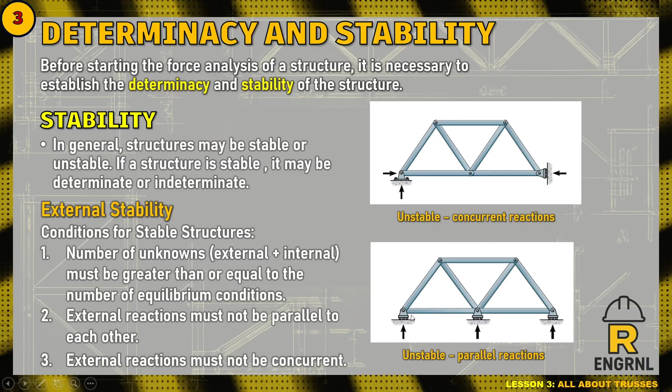External stability, you can classify again using this concept, and by common sense pa rin naman, of course, no? Gagalaw ba to kapag ganito, interconnecting rollers, supporting rollers, pero puro parallel naman. So, yeah. Sa determinacy, ganun pa rin.

If it is following the rule, may formula tayo, 'di ba? Tinanggal ko na lang muna yung sa frame and the beam. So, trusses. Diretso na natin sa pagkuha ng DI. R plus M minus 2J. Yan ang formula natin. R means external reaction, M means members, and J means joint. Okay? Wala muna tayong number of releases dito.

Pero kapag nag-solve tayo ng reactions dun sa supports ng trusses, merong mga tinatawag tayong compound trusses, di ba? Na connected with the links, connected with the joint, or connected by a series of added members na pwede mong hatiin doon para pwede ka mag-take ng moment doon. Yun yung tinatawag nating equations of condition. So, further to explain that, you can read that in our book.

So, by the formula DI is equals to R plus M minus 2J, we should know that if DI is 0, it is statically determinate. If it is greater than 0, of course, indeterminate, and you will get the degree of indeterminacy. Kung positive yung lumabas dito, yun yung degree of indeterminacy niya. But if it is negative, you can say that it is statically unstable. Okay? So, ganun lang din.

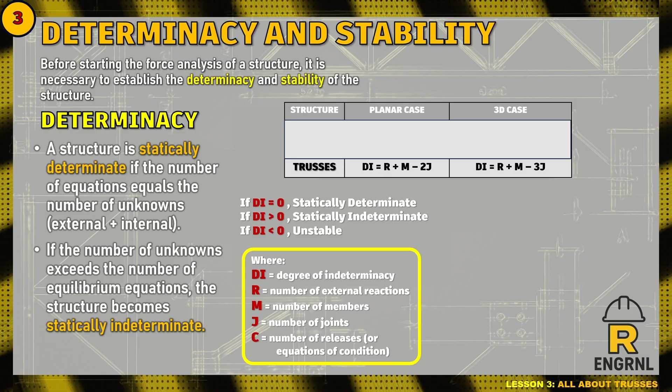So, let's try. Classify each of the trusses in figures as stable, unstable, statically determinate, or statically indeterminate. So, pwede nga statically unstable. The first truss, by observation, mukhang stable. Wala tayong nakikitang hindi triangular dito. And also, the supports are a pin and a roller, which is not concurrent, not parallel, a good example of support. So, externally stable yan. By observation, internally stable also.

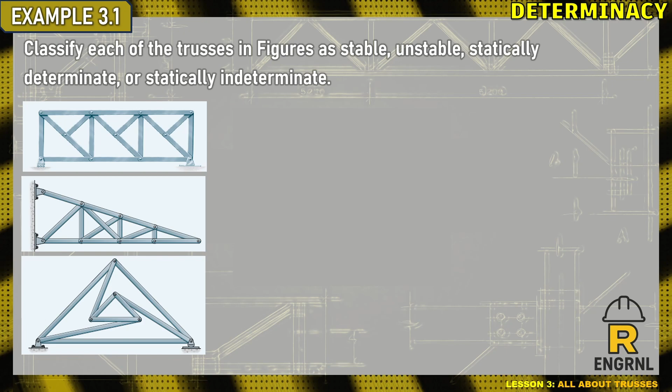Hindi na to katulad nung una natin na pag ito ay classified as truss, hindi mo pwedeng tawaging internal support or internal pin itong mga to, that is joint in a truss. So, let us check using formula. M is equals to 19, J is 11, R is 3, using pin 2, roller 1. So, by computation ng internal stability, 2J minus 3 is 19 and M is 19. So, this is equal, it is also internally stable. And externally stable, hindi gumagalaw kahit lagyan ko ng load.

So, pwede natin kunin yung determinacy. DI, R plus M minus 2J. Substitute, it is 0. It is statically determinate. You can get the reactions using 3 equations of equilibrium. And later on, alam ko familiar kayo sa method of joints and sections, so you can perform that to know the forces in each member.

Next, in figure 2, this is a typical truss. Pwedeng makikita mo to sa mga canopy roofs, or truss ng mga billboards, 'di ba? So, technically, this is a complex one. Mayroong redundant dito, and series of simple trusses na nagpo-form ng triangular part. So, pag tinanggal ko tong support, internally pwedeng gumalaw-galaw to. But there is a support, externally stable yan by observation.

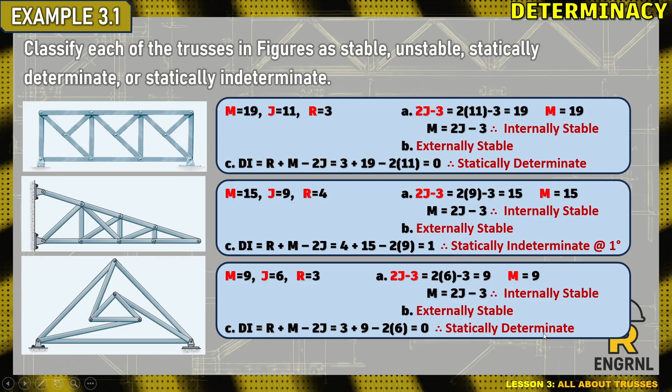Next, this figure, by observation. Stable ba siya? May nakikita ba tayong quadrilateral dyan? So, actually, I can say that this also is stable. But in computation, patunayan natin. M is 9, J is 6, R is 3. So, by substitution, internally stable siya. Externally stable din siya kasi walang parallel, walang concurrent sa support. And it is also statically determinate. Next, we have the last two.

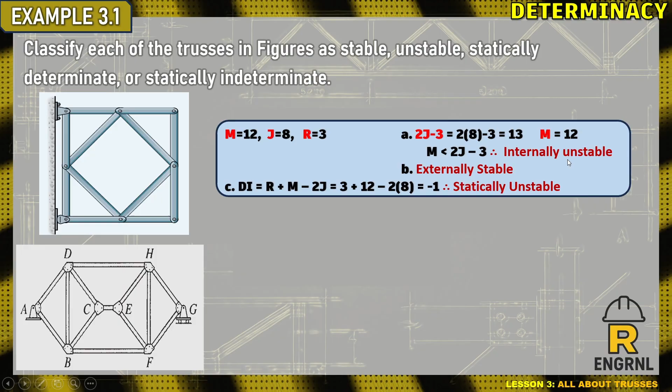Obvious na dito na unstable ito kasi it doesn't form triangle. Meron tayong quadrilateral dito. Kung kukumputin natin, internally unstable. So, externally stable pero internally unstable. DI, statically unstable din by computation, negative din lumabas. Pero sa last figure natin, by computation it is internally stable kasi the numbers are equal in the formula, but by observation hindi to triangle, nakakabuo ng parallel members na hindi connected. So, this is internally unstable.

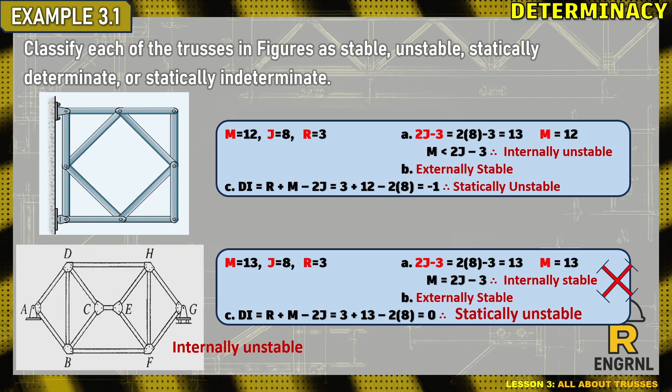Nung kinompute natin yung DI, 0, statically determinate siya. Pero mali. Sasabihin mo din statically unstable, kasi unstable na siya internally. So, siguro naman naintindihan na natin. I want you to read more about this and do the task here. Try natin gawin ito after watching this.